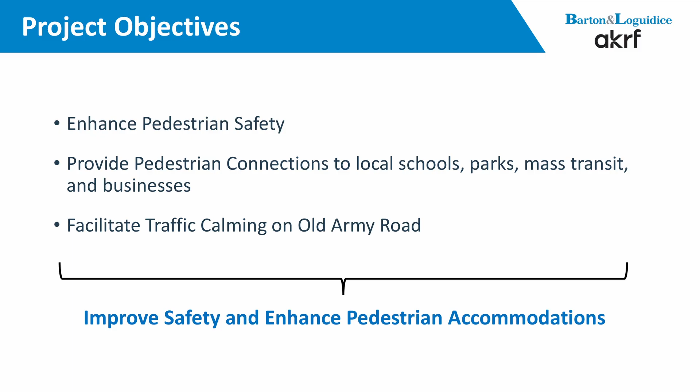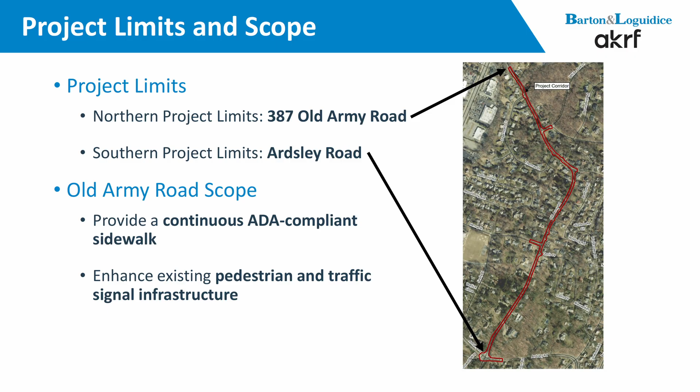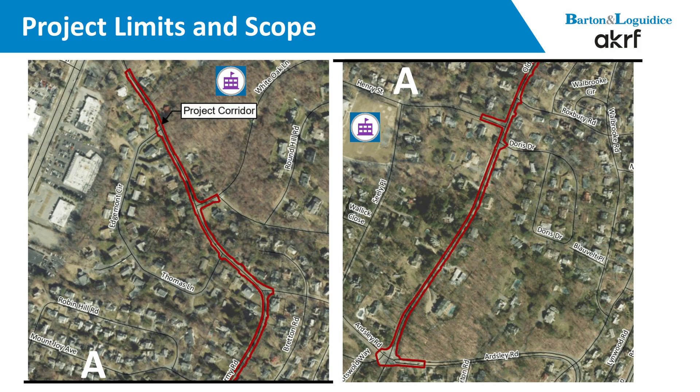So a little bit more of a close-up. The two schools, obviously we're at the one right now. Sealy is on the right-hand side of the screen. So how can we connect for future is another part. We're putting sidewalk along this corridor, but in the future the town would presumably expand upon that and connect to other developments.

For this project, there's Transportation Alternatives Program funding, so TAP. The town went after this opportunity a few years ago with the help of AKRF, got the money for design, any right-of-way acquisitions that are necessary, and ultimately construction, and then the mandatory construction inspection that comes with that. So that's an 80-20 split, 80% is the federal share, 20% is the local match. Roughly $4.8 million was the total project funding for this. The town share is just under $1 million.

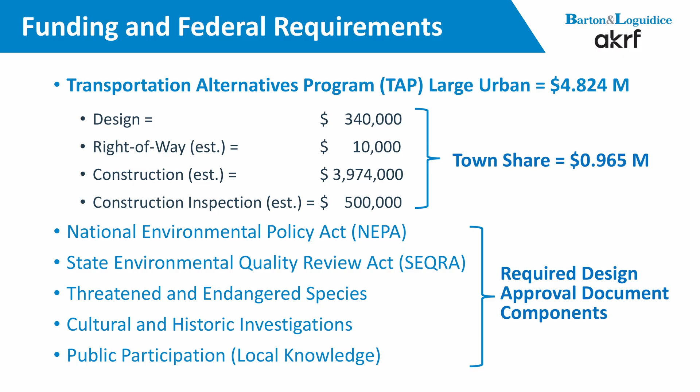With that funding, there's strings attached. So we have to make sure we follow the rules and regulations that are tied with that money. We have to follow the NEPA process, SEQRA, State Environmental Quality Review Act. With that, make sure we're looking at, are we impacting any threatened endangered species? Are there any cultural resources that need to be accommodated or protected? And also the public involvement portion of this.

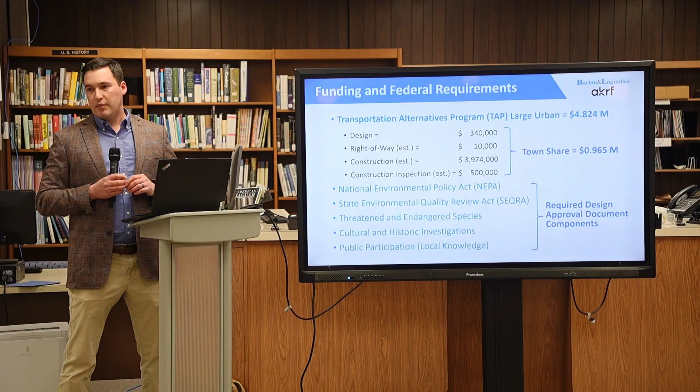So we're not local, B&L is not local, but we love to get the input of the local people who live it every single day, experience it more than what we can see. So those are major components that are required as part of the design approval process. All of that's packaged up into a report, submitted to the New York State DOT, reviewed, goes to the Federal Highway Administration, kind of get their blessing before we move on to the next step, which is ultimately designing the project corridor.

So some existing conditions, like I said, you all live it out there every day. There's a decent amount of vehicles that pass through every day, a little over 3,200. Vehicle speeds are elevated, it's posted at 25, we measured it at 35. You see more people, maybe some going higher than that, some going lower, but our design is based on the 85th percentile speed, how wide the lane should be, shoulders, and so on.

As you know, there's narrow shoulders out there now, and you can see in the picture it's a foot, 2 foot, sometimes it's down to 6 inches, not really conducive for bicycling or pedestrian access and so on. Also in that same picture, the walkways have varying conditions: asphalt, some concrete, maybe not so much in some areas or others, cracked, undulating.

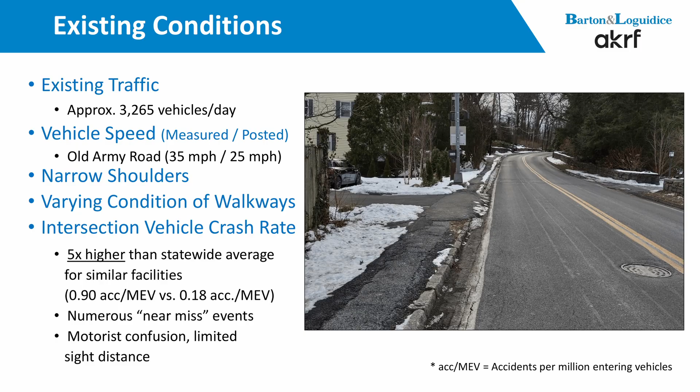Another existing condition we looked at, our team, AKRF, looked at the crashes out there, whether they involve pedestrians, bikes, cars, and came back - the crash rate at intersections, specifically the signalized intersection, is 5 times higher than the statewide average for similar facilities. So it's definitely something to account for in our design. Motorist confusion, limited sight distance, all of that coupled together are things that we look at.

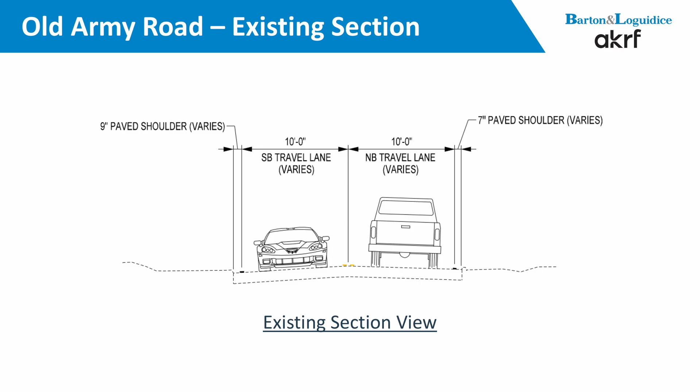So existing section, roughly 10-foot wide travel lanes, 1 in each direction. Shoulders are very narrow, like I said, 1 foot, 2 foot, or less in some spots. So what we looked at, kind of take all of that information together, use our design standards from New York State DOT, kind of come up with something that could work within this corridor.

So this project doesn't really involve full depth reconstruction or widening of travel lanes, nothing like that. It's just sidewalk. So what can we do? How can we fit that within this particular corridor?

It's fairly straightforward. We want to make sidewalks ADA compliant, 5 foot is our goal. We can go a little narrower when there are constrictions, whether it's right of way or something immovable, like a rock outcropping or utility poles. But most of the time we try to remove and relocate those utility poles.

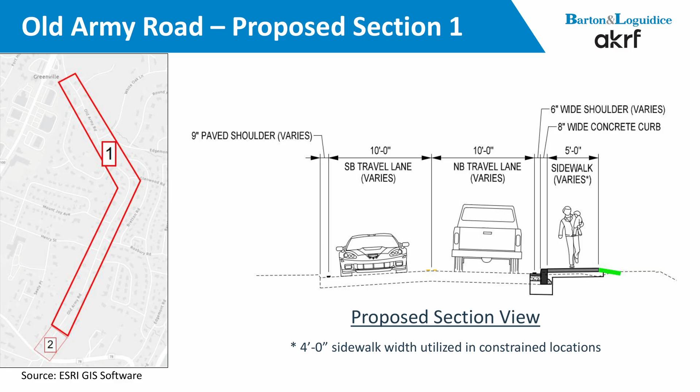Basically we're holding the white edge line that's there and trying to fit the sidewalk within that space. On the left-hand side of the screen is roughly the section shown, fitting within the map marked number 1. We feel like we can fit that in for pretty much the entire length.

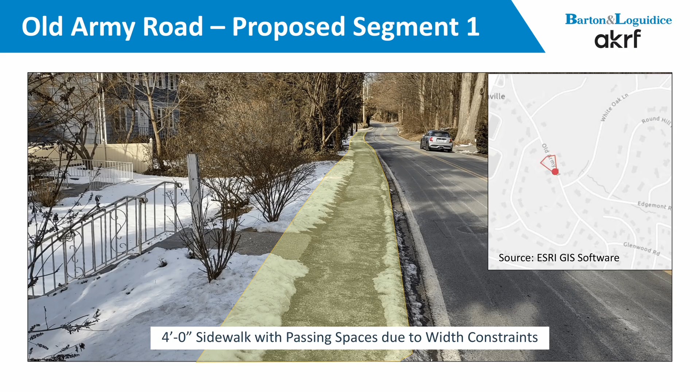To the next slide, like I touched on before, there are areas with constraints where we may have to drop down to 4 feet. That's still ADA compliant, but we want to limit that where possible. If we do drop down to 4 feet, we can only go certain lengths before we need passing spaces, in case someone with a wheelchair, or two people with wheelchairs, need a spot to go around each other. Those areas will be limited, but there will probably be a need for them out here.

The next section, between Ardsley and roughly the top of the hill, is a little different. There's an existing gutter there right now, and stormwater flows down the hill. We still want to accommodate that, so we're going to try to keep the same rough section that's out there now, but with a 5 foot wide sidewalk and a concrete gutter to channelize our stormwater, which we'll then collect.

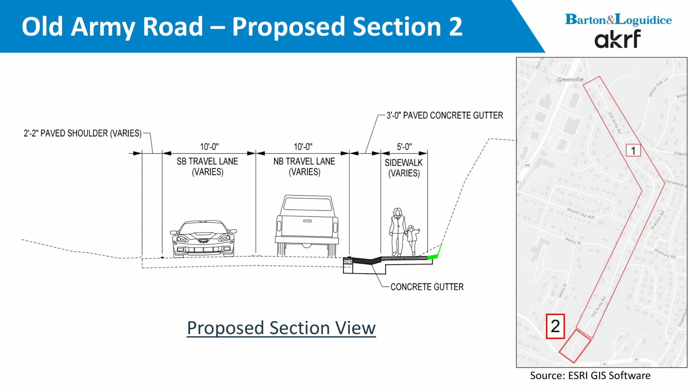Right now, there's nothing really collecting it at the bottom of the hill at Ardsley. It's concentrated flow right out onto the road, so we're going to attempt to collect that with underground drainage and then pipe it into the county system. We'll discuss that with them at our upcoming meeting.

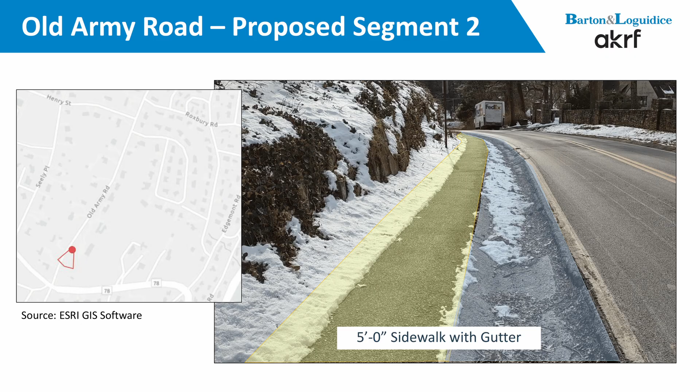Here's another rough view. The yellow is roughly where we're going to show the sidewalk. It's not really that complicated of a project, but we have a couple sections and views to show a few other areas we're going to focus on.

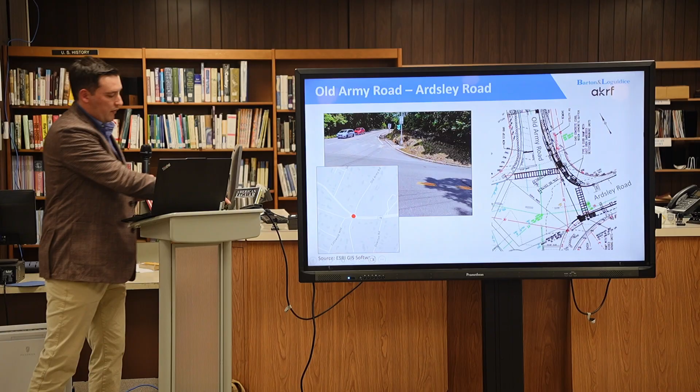At Ardsley Road right now, you can see in the picture on the left-hand side there isn't a crosswalk that goes to Ardsley. So that doesn't exist right now.

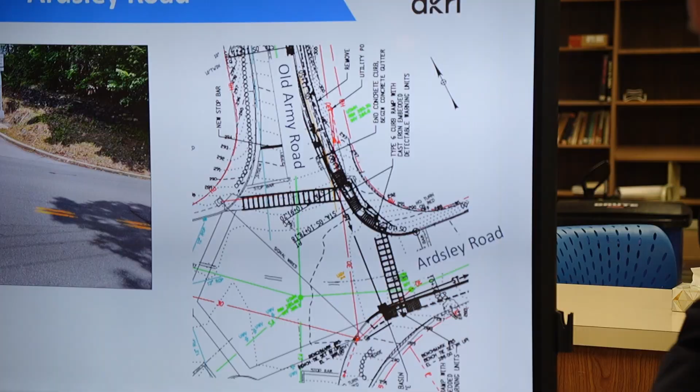We know there's a decent amount of people who walk to the train station. The only real way to do that now is to take a long way around using the crosswalks, but human nature being what it is, people probably don't do that. I know when we were out there, my coworker and I cut right across there. It's an all-ped phase, so vehicles are stopped, but there's no curb ramps and no crosswalk striping, so that's one component right at this intersection that would be addressed. That is a county road, which is one of the reasons we're talking to them, to make sure it's okay.

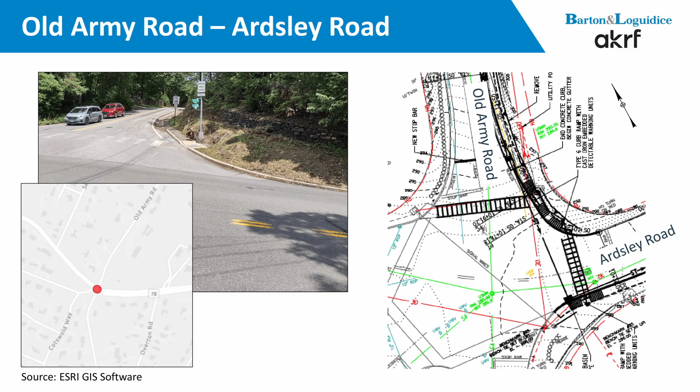In addition to the drainage as well, right now stormwater comes down and, like I said earlier, it's concentrated at the end of that gutter and just flows onto Ardsley. So we want to collect it, convey it into an underground system, and then pipe it into the existing county drainage.

Moving up towards Henry Street, there's a couple things going on here, as you probably all know. There's an existing set of stairs that is not ADA compliant, probably more troublesome to remove snow from, like now. So as part of this project, and/or a separate town project, would be the removal of those stairs and shifting the sidewalk away from that alignment, closer to the existing curb line, following the profile of the road.

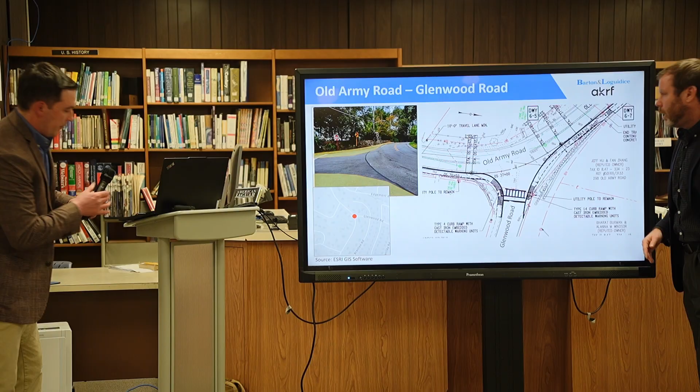Yes, so the design tapers the sidewalk tight to the road there, and then it would come around. So that would be represented here.

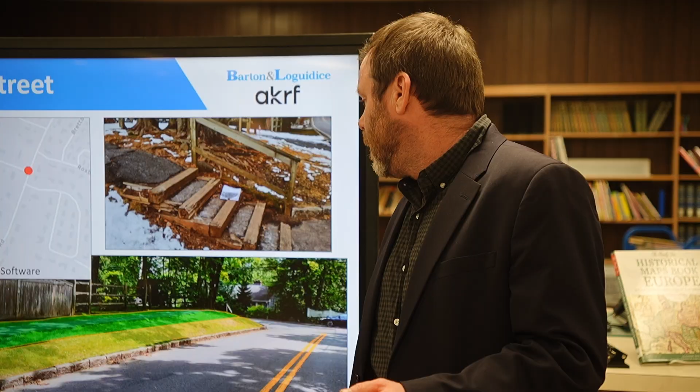The Commissioner of Public Works has indicated that based on the volume of calls we've received for this, we're taking a hard look at accomplishing that this summer. So we're going to keep you posted on that. And if that's done, it would be done outside of this project.

One thing with that, Pete talked about the federal money and the state reviews and all that. As you might imagine, that takes quite a bit of time. Things don't always come back very quickly. They'll go out and it takes a long time for that review.

So the whole project will not be constructed this summer, but the town, understanding the need for this situation, is going to get it done earlier outside of that window for this project because it is an important aspect of this. We'll be using that funding in another location on the project to improve something else while that's done quickly, because we're really tied by that federal process of a long time period. It's just normal. It's what they do.

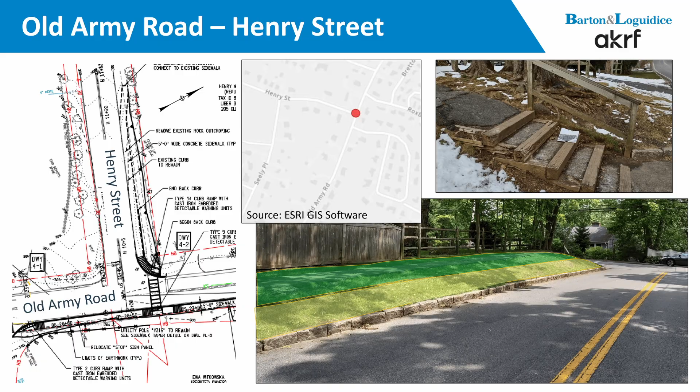So just a little background on that. Currently this intersection is stop controlled, and it would remain stop controlled as part of this project. As I'm sure you've all seen, there's an existing stop sign with flashing LEDs around it. We anticipate that staying, or enhancing the opposite side, potentially a raised crosswalk at this location. It is stop controlled, but the raised crosswalk would help slow vehicles down that are rolling through it. Just another treatment in our bag that we can use to help make people more compliant.

Nobody rolls through the stop sign there, right? Nobody in this room, right?

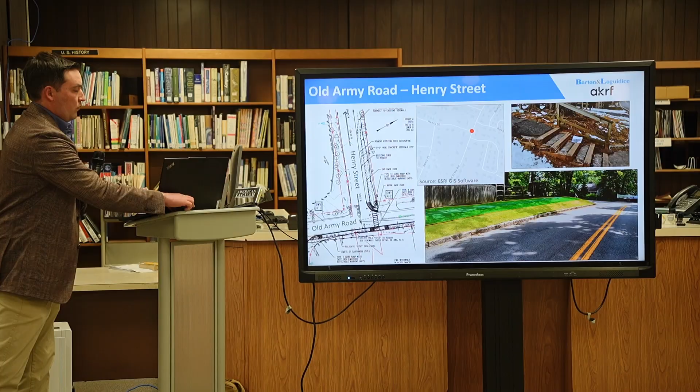So moving up to Glenwood, a wide expansive pavement area here. One thought is to help reduce the length of the crosswalk, so where people would be exposed to vehicles. It is a stop controlled intersection on the minor approach of Glenwood, but the less time people are exposed to vehicles, the better. So one thought is to have bump outs where you move the curb out a little bit, still accommodating turning vehicles, garbage trucks, school buses, delivery vehicles, and so on. So we have turning movement programs that actually model those movements to make sure that they can still be accommodated before shovels get in the ground and it's actually constructed.

So that's one potential improvement here. There's existing retaining walls also in the location, you can see on the picture roughly. There's a fair number of retaining walls like that in the corridor that we want to avoid. We don't really want to touch those. They add great character to the corridor, and they're pretty expensive to replace and so on.

So keep that where they are and kind of work out from there to make sure we have our ADA compliant pedestrian elements. Just wanted to also mention that would be an opportunity to pick up additional green space. It's modest, but all this pavement could be landscaping, mulched, and it could look nice.

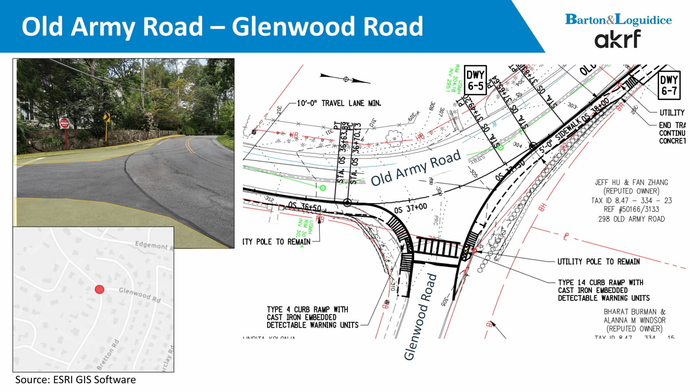So the plans that we have shown on the right-hand side are, like Garrett mentioned earlier, preliminary. It's part of the process to go through. It's something that we've looked at, something that potentially could work in this scenario that ultimately will go as part of our design approval package to the New York State DOT. We are expecting to get comments from you all and then modify what we have before we ultimately submit it to them. But we have to start somewhere. So that's kind of what we got.

Shifting down to White Oak Lane, currently a signalized intersection with pedestrian push buttons and crosswalk striping. The push buttons work. A lot of times in communities they don't work. They're there, and maybe over the years they haven't been maintained or whatever, but these are actually functional. We tested them out last week.

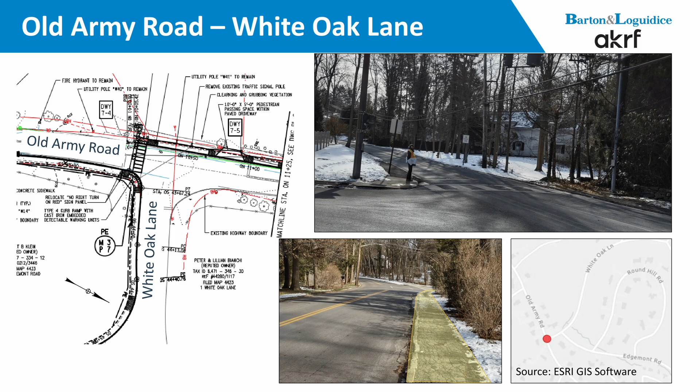As part of this location, the sidewalk would shift from one side of the road to the other, but as I'll show in another slide, which isn't shown on this particular view, was something we just discussed with the town recently about extending the sidewalk from White Oak Lane to Thomas on the opposite side of the street. So it would be two parallel ribbons of sidewalk from White Oak to Thomas, rather than have a mid-block crossing at Thomas, which adds other elements of safety that if we can avoid, we'd like to. We'd like to have people cross at the crosswalk under the signalized intersection with push buttons and so on.

So this is another view of that. It's real rough, just sidewalk on both sides, curb face, 5 foot wide sidewalks.

So another example, this is just shifting a little bit farther down. Actually, this is right in the area between Thomas and White Oak. Like I mentioned earlier, we try to keep those retaining walls where they are and work off from there.

There's, I think in this particular view, a stump that would be removed. Utility poles, if those are in the way, we would move those within the highway boundary. If those can't be moved easily, then we would go around them, narrowing the sidewalk to 4 feet at the minimum.

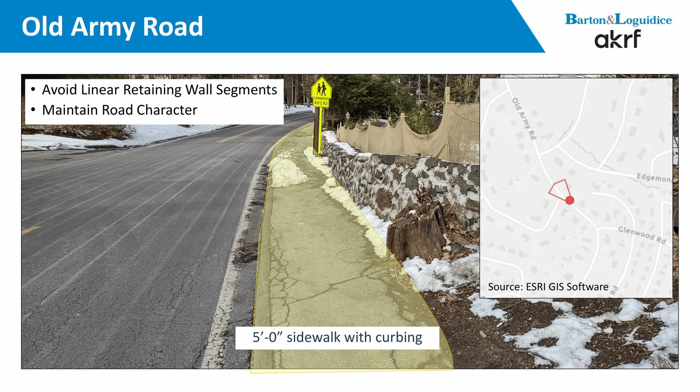One of the reasons too, sometimes we go around those utility poles is because we're on curves here, and when the utility company has to move one pole, it usually means they have to move 6. And it is on their dime, but that also takes out a lot of the tree canopy when they do that. So shifting poles around does have a lot of after effects, and we try to avoid that as much as possible. Also, Con Edison doesn't always get the work done as quickly as we'd like, and sometimes can put delays into the project unnecessarily just for a few feet. So it's a balancing act that we do with that.

We've got a number of projects where we're trying to avoid the poles being moved, and the municipality insisted they would be moved, and they did a lot of tree cutting, and they weren't happy about that, and it just kind of steamrolls from there. So I know the trees are extremely important in this corridor to everybody, so we're cognizant of that. The town is cognizant of that, and we're going to try to minimize that as much as possible. So that's where that utility stuff comes in - things you don't really notice when you're driving by, but that's what happens.

So there are some locations where we're not able to maintain some of the features. This is one location that's pretty tight. This is, I think, close to Mount Joy - the retaining wall does project out into the town's highway boundary. It would be something tough to maintain. So we're looking at ways to potentially avoid this, but it's an example of something that, if it is in the way and we can't shift the road, we can't narrow the sidewalk any narrower than 4 feet. It's something that would have to be modified.

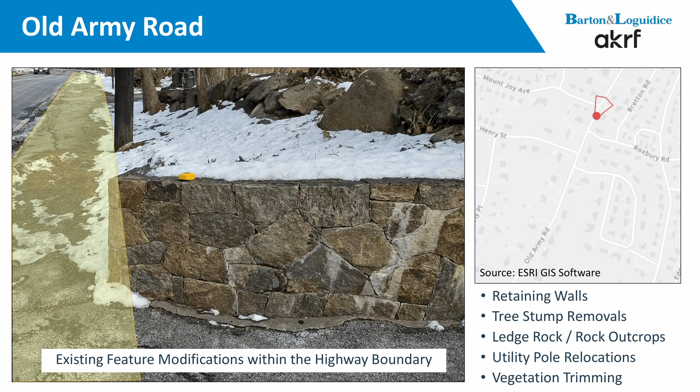So tree stumps, retaining walls, there are a couple locations of exposed rock that we would have to hammer out. No blasting or anything crazy like that - we don't want to do vibration monitoring and everything else that comes with that. But there are locations with these constraints that we try to avoid, but if we can't, we have to modify. Like Tom mentioned, vegetation trimming - when we were walking out there, there's vegetation that brushes your shoulder. Things like that would be modified or trimmed to make it more conducive for people walking.

Does that mean that you would hammer out the ledge just north of Ardsley Road on the eastern side? What do you do with that? There's no 4-foot sidewalk space there. Correct, yeah. We were originally thinking of avoiding that and having almost a bump out into the travel lane to avoid that. And then when we were out here last week, I think it's going to be a combination of both - it looks like it's been previously removed for the pedestrian signal that's there now.

But we do know that just beyond that rock, there's an existing stone retaining wall, and then it's very steep. So we don't really want to get into changing the whole character of that hillside, because it has right-of-way constraints, cost constraints, and so on. So it's going to be a little bit of both - I think removing some of it, but also shifting the curb line a little bit so we can get our sidewalk element in there.

Just another example - if we have right-of-way on the backside of this existing path and we can't move a utility pole, that's one requirement, I guess, rule that Federal Highway Administration won't allow us to do. We can't acquire property to move utilities. So in this case, we would either modify the positioning of the road a little bit or narrow the sidewalk.

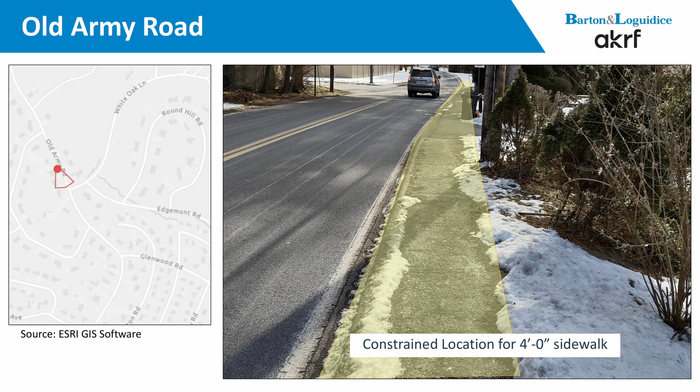Yeah, one of the constraints here is the steep slope behind here also. You start widening there, you start chasing that down the hill, and that's just a vegetation disturbance and property easements and things like that. So we're looking to try to avoid that as part of the design.

So our schedule, we're almost to the end. We're in the preliminary design phase right now. Like I mentioned earlier, we have our ground survey, we've done a preliminary layout, and we're engaging the public, you all, to get your feedback on some thoughts.

We're looking to have design approval, meaning addressing public comments, refining the preliminary design, completing our environmental, completing our design report, submitting that to the DOT for review, addressing the DOT comments roughly in the next couple months, so April 2026. Once we have design approval, then we could begin final design, meaning we're putting together a package that a contractor could then essentially go out and build.

While we're doing that development of the design package, if there's any right-of-way acquisitions that are needed, that process would begin at this time as well. For this corridor, any acquisitions are looking at permanent easements or temporary acquisitions - we're not taking anybody's house, we're not taking significant or large pieces of property. It's minor strip takings. We know everyone's home is their castle, so we're cognizant of that too, that we're not just blanketly going out with big bad government coming in and taking property. We're aware of that, it's not something we're trying to do.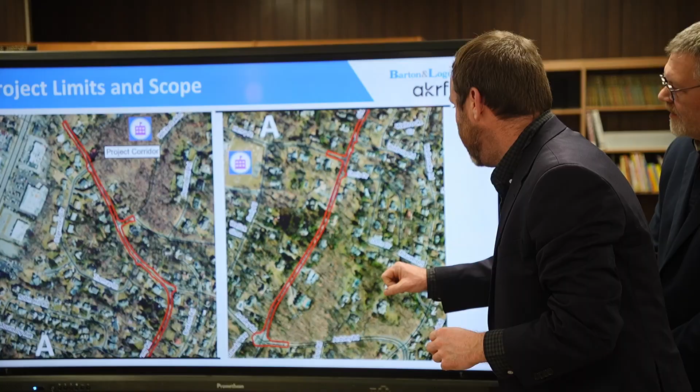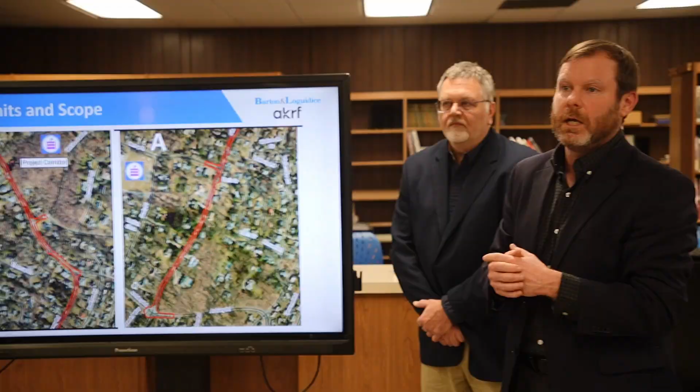That's generally been followed, but we were able to piece together a little bit more with that section from Thomas, because we recognize it's very unlikely someone's going to walk all the way around to Edgemont Circle to double back. One thing we also failed to mention in the presentation - at White Oak Lane, towards the school there's about a 250 foot section that's of poor quality. That's going to be improved as well, as part of this project.

Hi, I live on Thomas Lane, so I really welcome these changes. That would be amazing. Even though my kids are older now - one in college, one in high school - we used to walk the kids to Seely and have to look both ways and run across Old Army to get to the sidewalk on the other side. So for the future, that's a great idea. I really like that second sidewalk, and the raised crosswalks are a great idea to slow people down. My wife and I walked our dog at night for 7 years, and we've seen people speeding - not exaggerating - 50, 60 miles an hour, going right through the stop sign at Henry Street like it wasn't there.

So raised crosswalks at least - because I've been requesting speed bumps from the town for years, and there's always this reason or that reason. According to code, we can't have it between a corner and somebody's driveway, we can't have it around a turn, it's this and it's that. But they put them on Pipeline, which is a straight road that nobody walks on, while all the children are on Old Army, and they don't want to put them there. So this is a big improvement - congratulations, that's a great idea.

Thank you. So I realize funding is not infinite, and safety is of paramount importance as part of this project. I was just curious - I didn't hear anything, because I live on the wrong side of Old Army, on the non-sidewalk side already. Is there anything going to be put in place that enables families and children who want to walk to school in either direction to do that more safely?

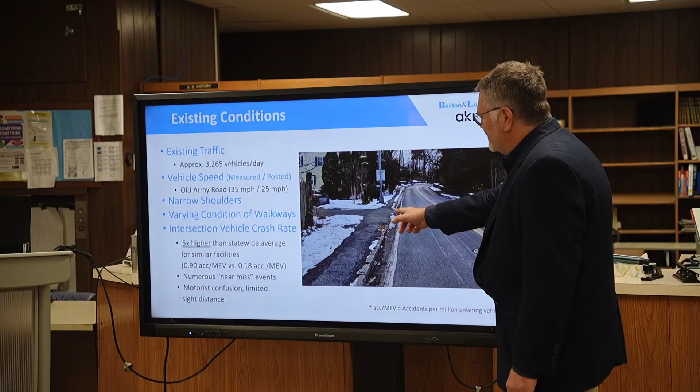So that right there, see how low it's pointing, that that is the only drain on that 1,000+ foot stretch from Ardsley to Doris Drive. There is one lone drain there, and it gets overwhelmed.

If it's going to rain, the town has to come clear it, but if they don't remember, I go up there and clear it with my hands, because if I don't, the water comes down onto my property. But even without that, it jumps over the curb and comes down onto the other side. We have video, so we're happy to fill out this form and send the video.

It just pools right there, and then it jumps over the curb, and that happens all the way down. You had said that you were exploring ways to fix the drainage down by Ardsley, so it doesn't just spill out there. But in terms of controlling and managing it before it gets there, are there plans to put in more side drainage along the way, or are you just going to pipe it along the way that it is now?

We will improve the capacity of the drainage structures. There's limited drainage infrastructure that we can connect into, so we've got to be aware of that. We can't have an 18 or 24 inch diameter pipe flowing into a 12-inch pipe. So we will certainly take note of this and see what we can do.

Do you live right here, or are you on the street? We're on the street below. So that little bump there, the sloped driveway, that was because when they constructed that house, water was just going through the broken sidewalk and flooding down onto my property. So after some complaining, they put that in to try and keep the water on the road, but it doesn't really work, it still goes over.

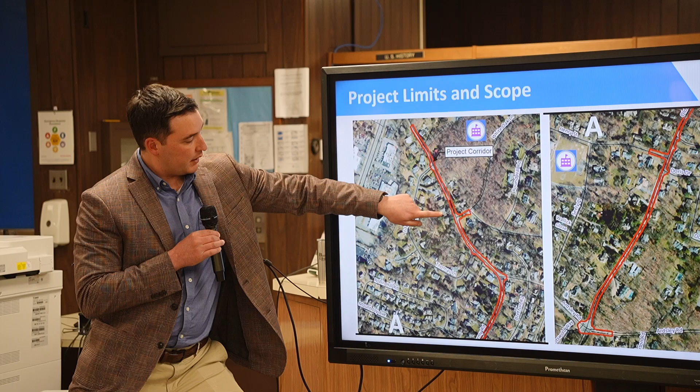The sidewalk would be on both sides from Thomas Lane right here to White Oak. So that's both sides, and then on one side - the left-hand side of the screen, south side, non-school side - that's existing all the way up, to be replaced. Nothing on the other side of that juncture.

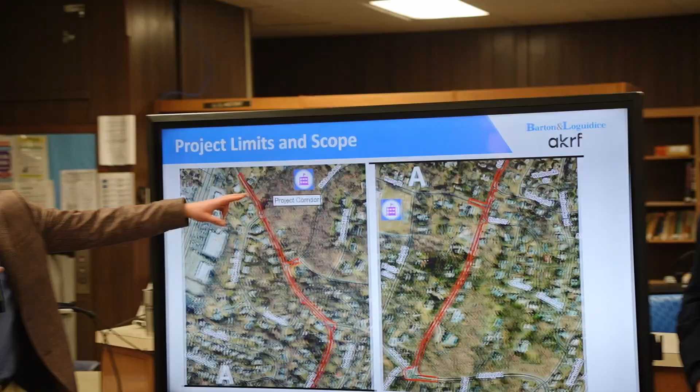The existing crossing that you mentioned here to the school - we were actually out there tonight looking at that, potentially what we could do. There's sight distance that we have to check on, make sure that if we do put a crossing there, it's so close to that light and people come through that light so fast it would be dangerous. So it hasn't been ruled out yet, but it's definitely something we've got to cross our Ts and dot our Is with. If it doesn't make sense, then we won't do it, but it's on our radar to look at further.

One other design element I forgot to mention, because it's on the town's agenda as opposed to the grant, is the signal at White Oak Lane. It relies on loops in the ground, and if the vehicle doesn't pull up far enough, it doesn't trigger the loop so it's recognized. That signal will evolve to a camera ahead, which will respond to traffic volumes better, and essentially the loops will not be relied upon. So that's something we're also looking to implement, perhaps this year - we're cognizant of the inefficiency of the loops system and the traffic that's out there.

I have a few topics, and that was one of them. So can this funding be helpful for improving that and making it a smart light? Because do you want us to write all these comments down? Yes. Do you want us to also say them? We're taking both notes, and we're going to go back and review this afterwards, so that's why we're recording it. It would be great to hear what happens if that's a smart traffic light at the intersection of White Oak Lane and Old Army, because there's tremendous backup there at very specific and predictable times of day. That can make a huge difference.

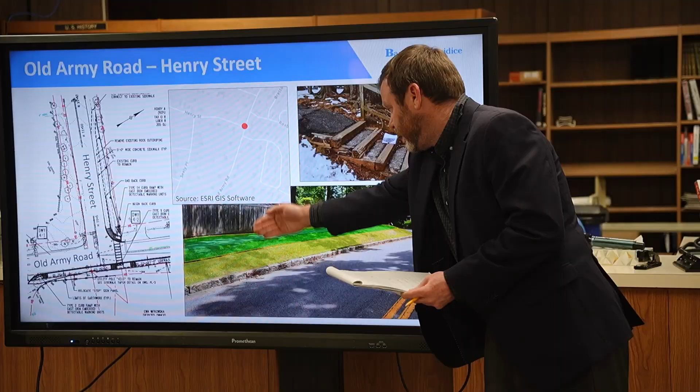Understand the concern. Ultimately, if you drop a hard retaining wall at the edge straight down, you pick up all that space—you're excavating all of it. It's a big project, but we understand the concern. We're going to look at it.

Garrett, with the building materials, it's all concrete. Granted, it's not the great, beautiful stones we used to make curbs, but it's what's practical in 2026. Is there a chance you could conserve costs in some areas by using asphalt for the walkway, not the curb, like was done on Robin Hill Road recently by the town? Can we essentially use some of this money for additional pedestrian projects in Edgemont—not just across, but in this specific corridor—so that it's approved by the federal government?

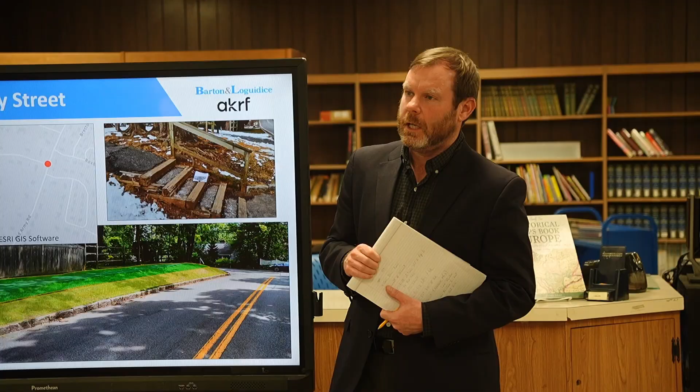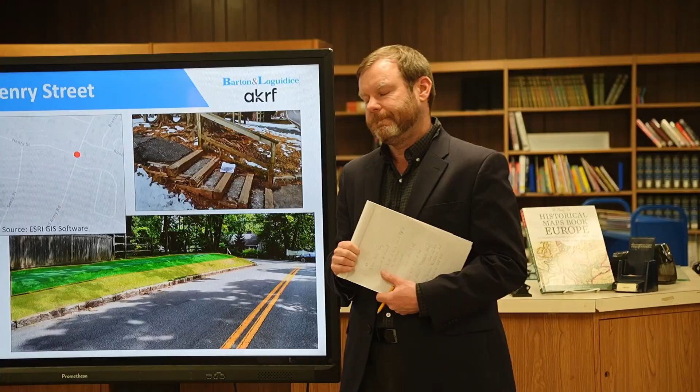Not that it's a bad idea, but New York State DOT will not allow it. It's a federal grant, but it's administered by New York State DOT, and unless it's a shared use path that's 8 feet wide, it would not be allowed. Not a bad idea, but unfortunately asphalt specifically isn't allowed—it has to be concrete, for the sidewalk, for the scope and purpose they define.

So New York State DOT acts as an agent on behalf of the Federal Highway Administration, which acts on behalf of US DOT. They answer to that realm, and we're just down here at the bottom trying to get it built.

And then just re-emphasizing about curb height—if you look at the highest point of Old Army Road, the curb is about 2 inches tall because it's been paved so many times. So if you could do this project once and for all, make this curb big enough that speeding cars aren't going to act up.

On 381, where I lived for five years, one of these drag racing cars came off Central Avenue at 11 o'clock at night, and it was a shocking sound—so loud it sounded like an airplane landing. They sped up from Central Avenue so quickly. I got a chance to talk to the driver because his car ended up on the sidewalk. He said he lost contact with the road because he was going so fast coming up that hill, and he got onto the curb because the curb isn't very high.

So a higher curb can help protect the kids—we're going to fix that. But you can't have it too high, because it's too steep a step for people stepping off, in case they trip or misstep—over 6 inches is too steep. That's why we can't go over 6 inches unless it's a very special case. But it will be 6.